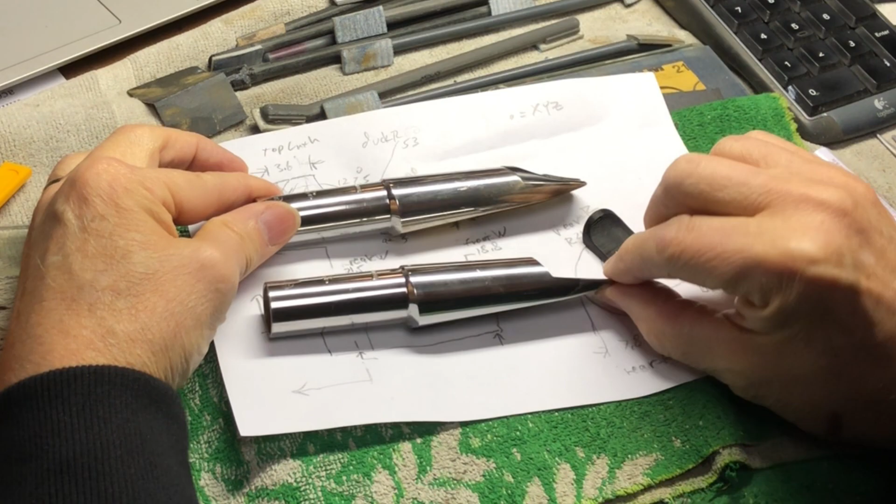Here's a video on making a tooth deck for a metal mouthpiece that's missing one. This is a Runyon Quantum. They're no longer made, but these were sold both with and without tooth decks. My client sent me one without one.

I own one myself with a tooth deck, so I have a good reference to go by. I've also made a tooth deck previously for a Brilhart Level Air, using a 3D printer. I have made them out of acrylic before, casting and shaping them, but this is just a new way of doing it. It probably takes more time this way, but once you figure it out, you have an object you can use for others.

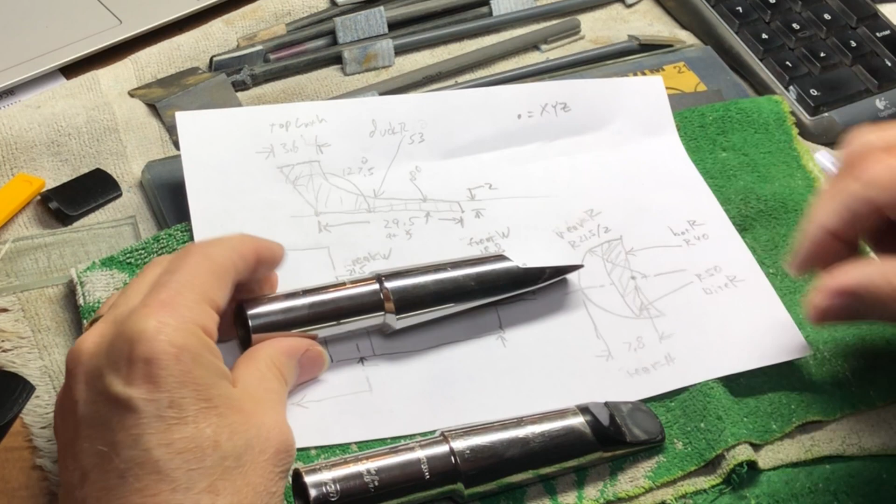We first start out by taking a lot of measurements, and I made a sketch here, taking a bunch of key measurements off of this mouthpiece. I'm going to be working in metric.

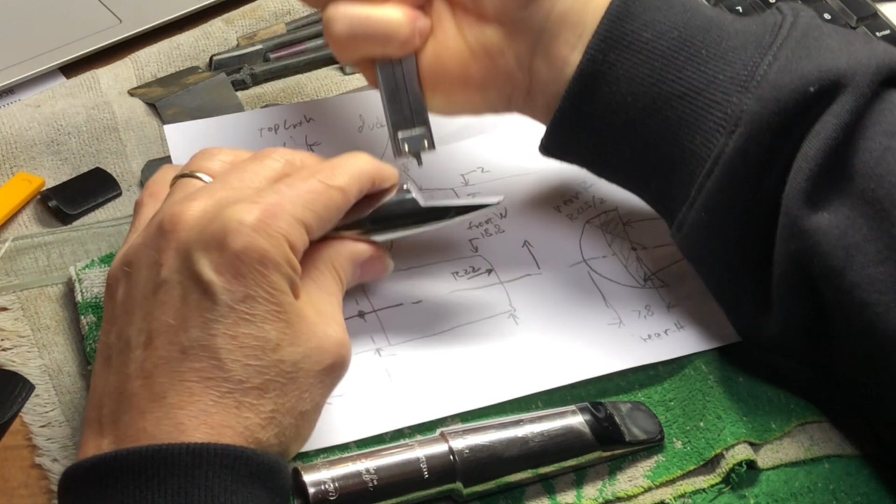So I get the width of the mouthpiece here, which gives me the diameter. Then this drop here, you have to decide whether to measure diagonally or straight across. You do have to do some trigonometry to get all this to work in the CAD system, but there's a drop here that's shorter than the radius, so this point is above the center line.

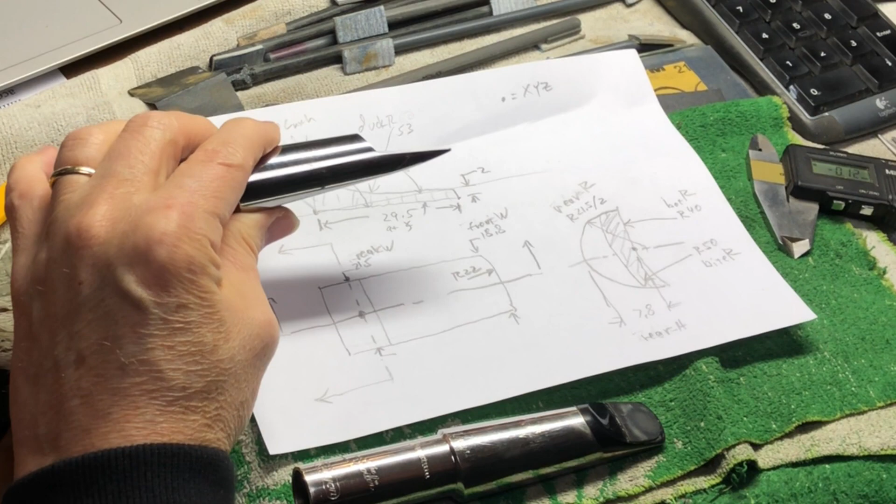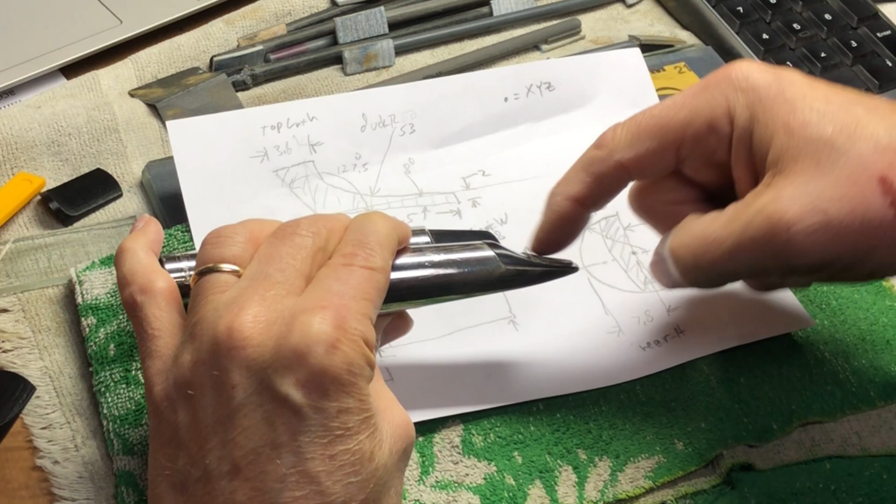Things I've observed on here: you've got a flat angled back piece. This bottom part is curved, and then you also have to model the top round and the duckbill part. The duckbill is curved in this direction and this direction.

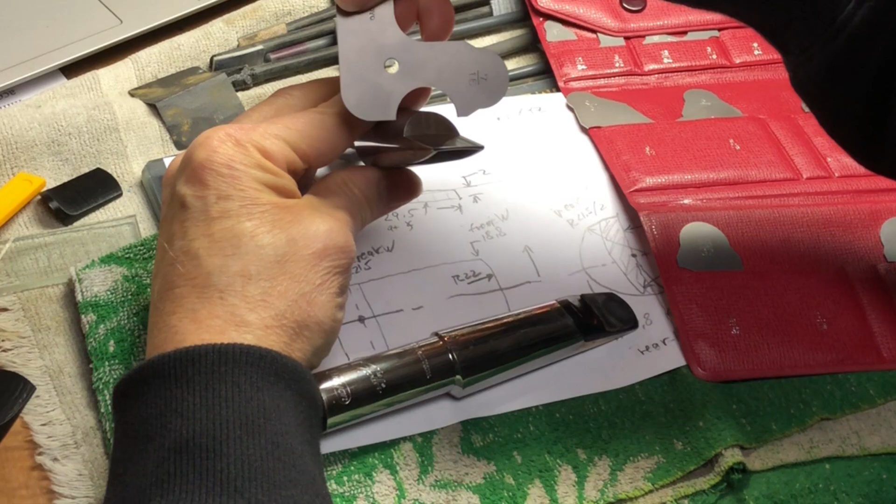So for some of the measurements, it's handy to have a set of radius gauges. On this one it was easy to measure the diameter, but you can use these to verify things. The 7/16, which isn't metric, is too large, and the next size down, a 32nd smaller, is a little too small, so it's in between those two. This is handy, but it has a limited range, mostly smaller sizes.

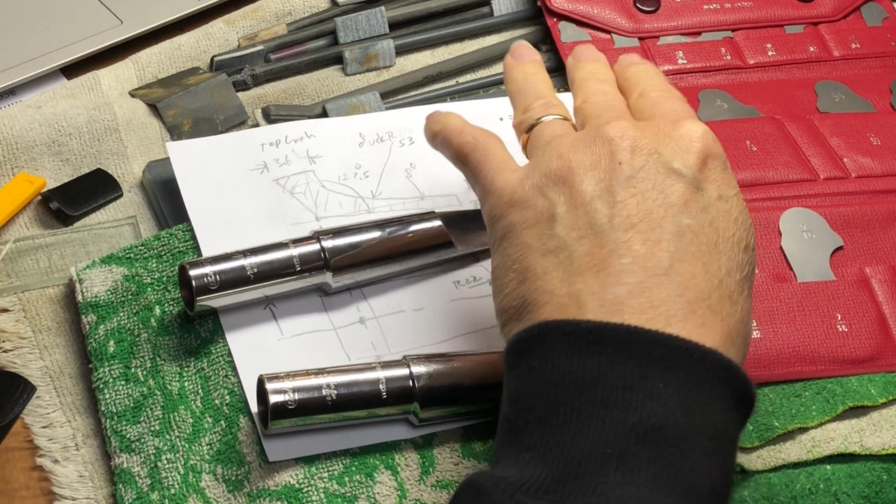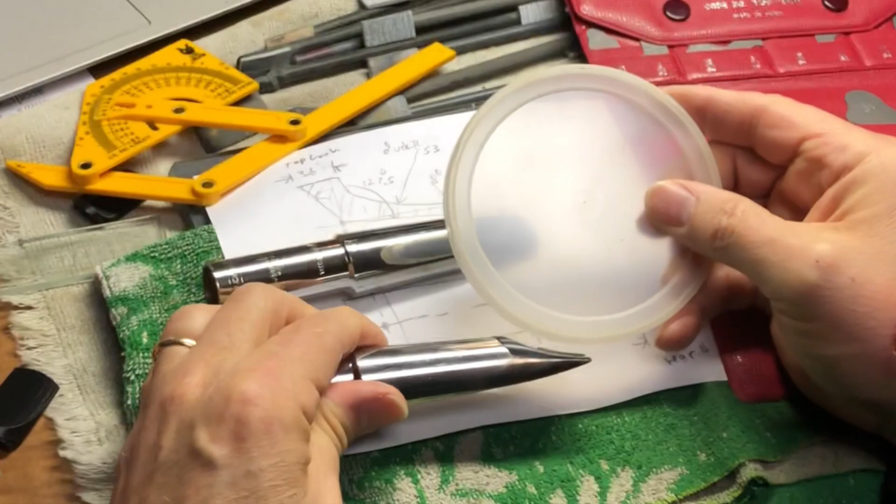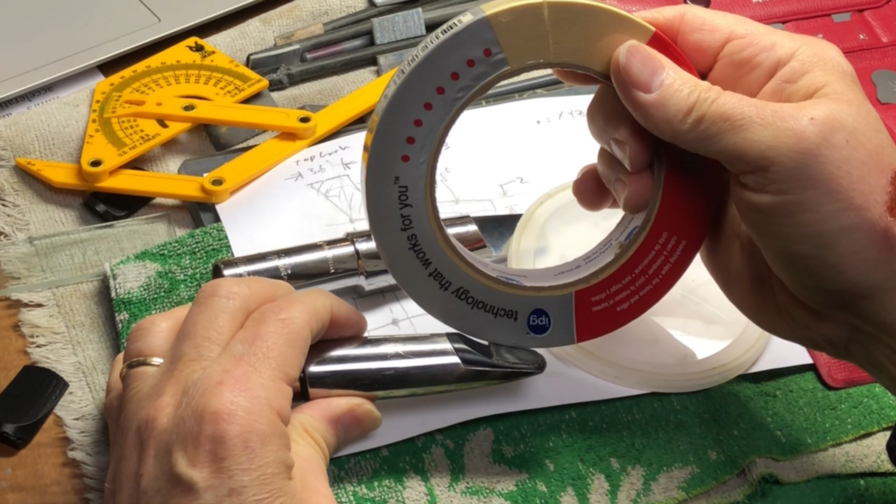When you get up to a larger radius, you have to look around for objects you may have around the house. In this case, like a coffee can lid - I held that up there and it was real close - or a roll of tape. You can measure these diameters and get a starting point at least for those.

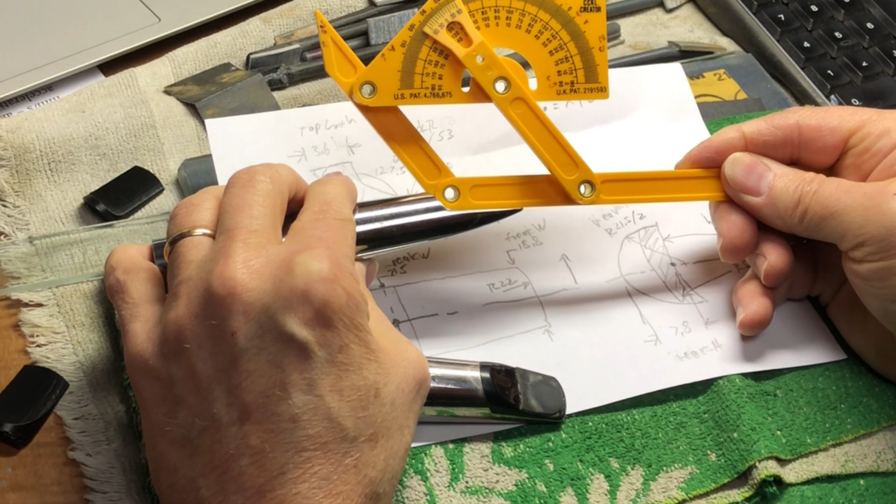What else? The angle. You can just guesstimate, or use one of these gizmos, but they're hard to use on tiny objects to get an accurate angle. It's better than nothing though, and you have to figure out which scale you're on. I thought this was around 127 degrees. Then you're just going to have to make some and adjust the dimensions at the end. So there's a starting point.

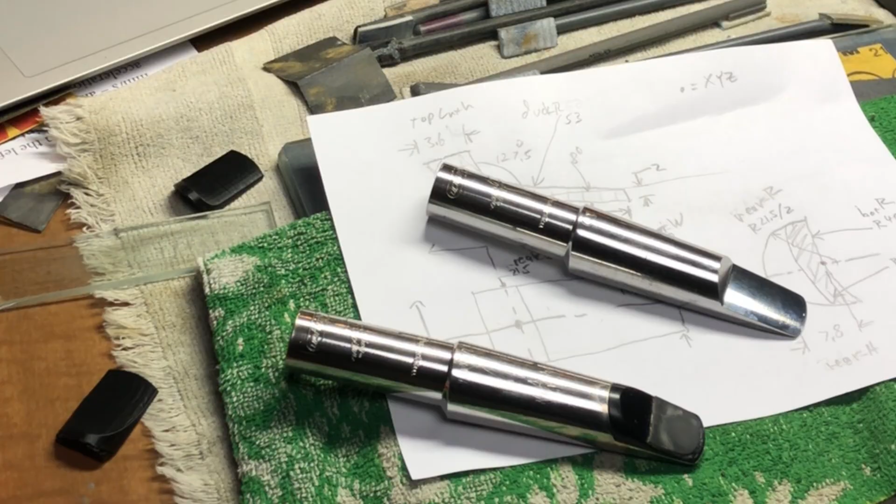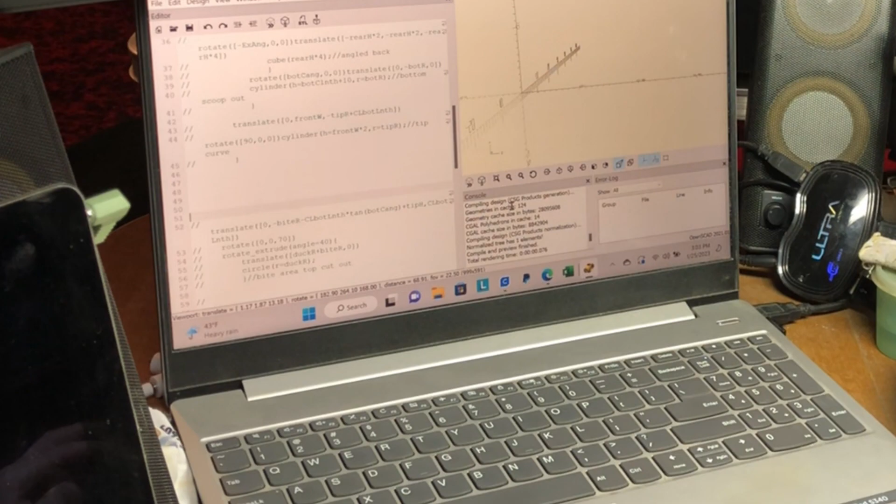Now I'll show you what I'm going to be using for modeling: a program called OpenSCAD that I like. I've tried using FreeCAD too, and I've designed mouthpieces in both systems. I prefer this one - there's pros and cons of both.

So this is more of a programming language. It gives me what I want, but it isn't mouse driven - it's code driven, as I'll kind of demonstrate. Now what I've done is I've created a bunch of variables in here.

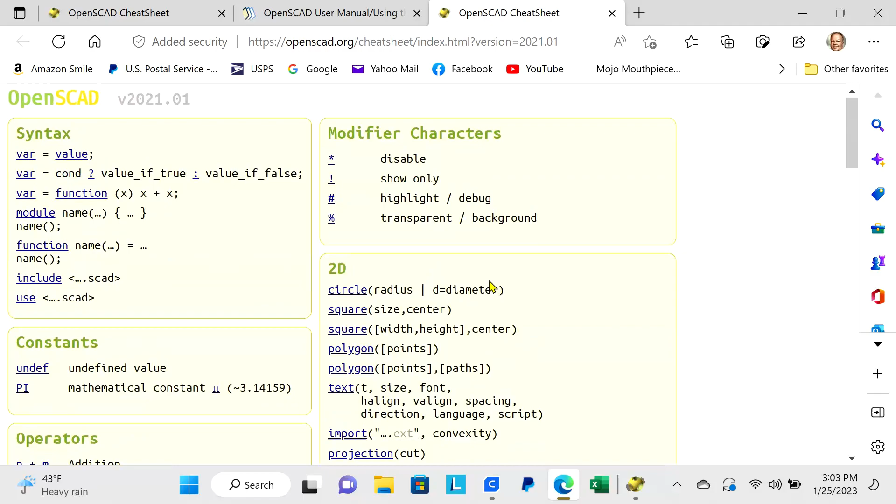There's a lot of tutorials on YouTube for getting started in this, and there's also a cheat sheet online that has all the commands. You can click on these commands and bring up individual detail about them, and learn a little at a time. A few basic commands take you a long way.

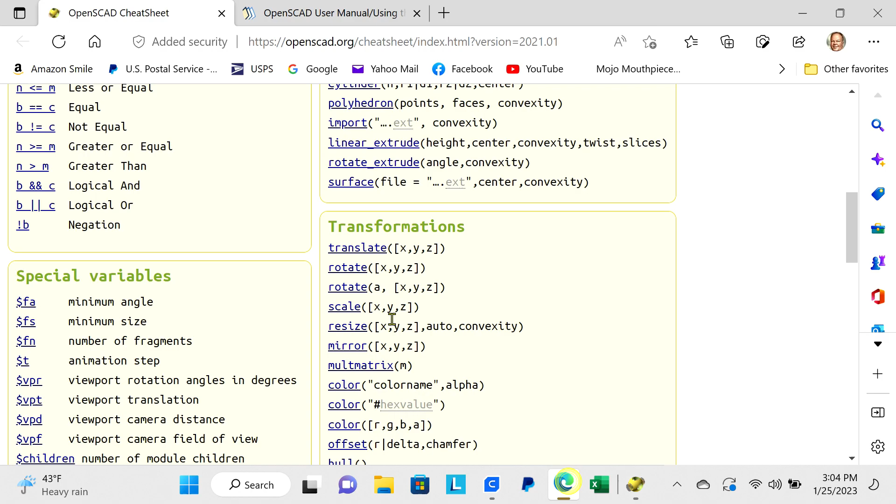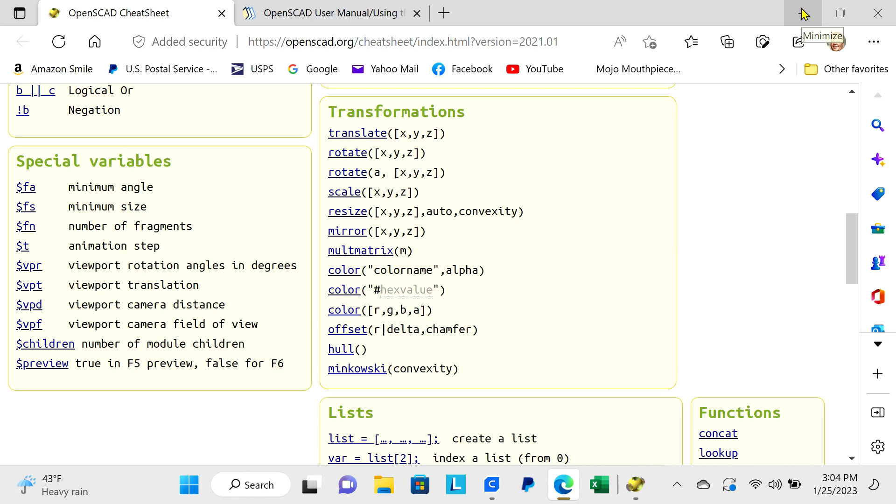So I start out with a $fn on almost everything. According to the cheat sheet, that defines the number of fragments in a circle. Their default is a little lower than I like, so you got to pick something closer to 100 to get some nice looking surfaces.

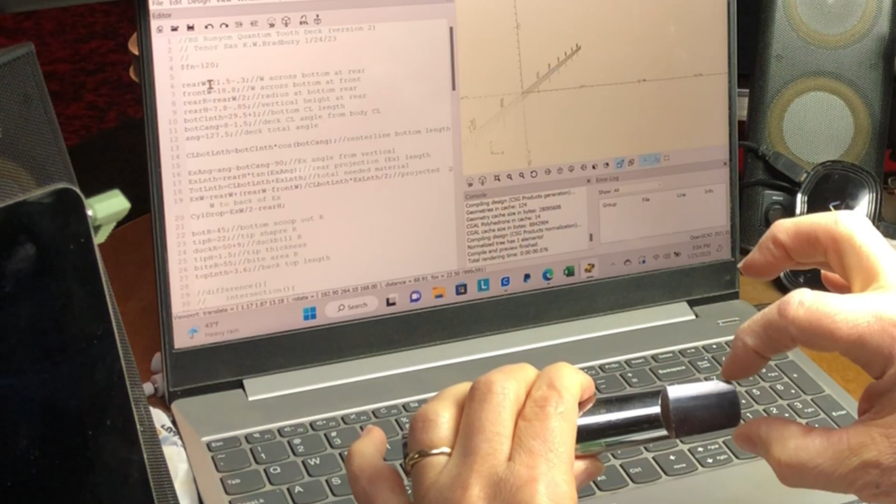Anything with a double slash is a comment. So here I define the rear width across the mouthpiece, then the front width, then I calculate the rear radius - they're all documented on here. Angle 127.5 is my starting deck angle there.

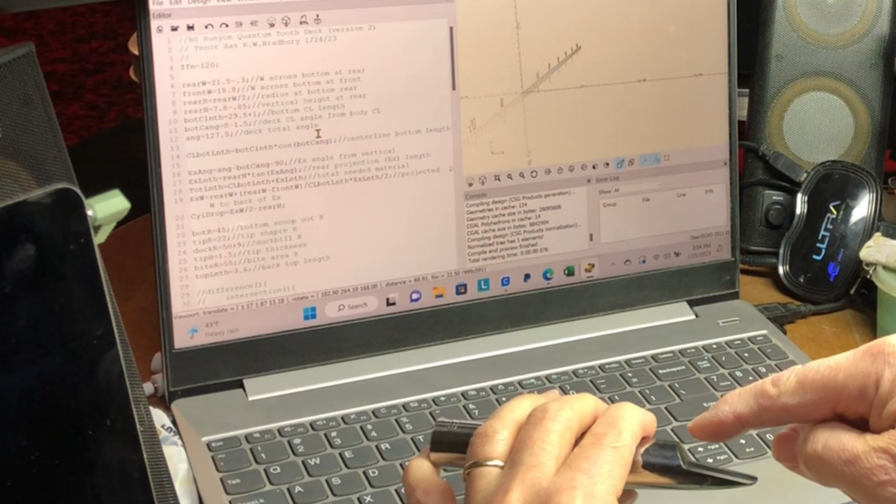It ignores everything after the double slash, so they just comment on what your variables are to try to help you remember it, because there's no graphical way of showing it in here.

Now the code, you don't have to indent it, but it makes it easier to see a lot of commands that may be multi-line long. So I do that. I also try not to put too many commands on one line. It's easier to read, and as I build the code, you'll see how I do it.

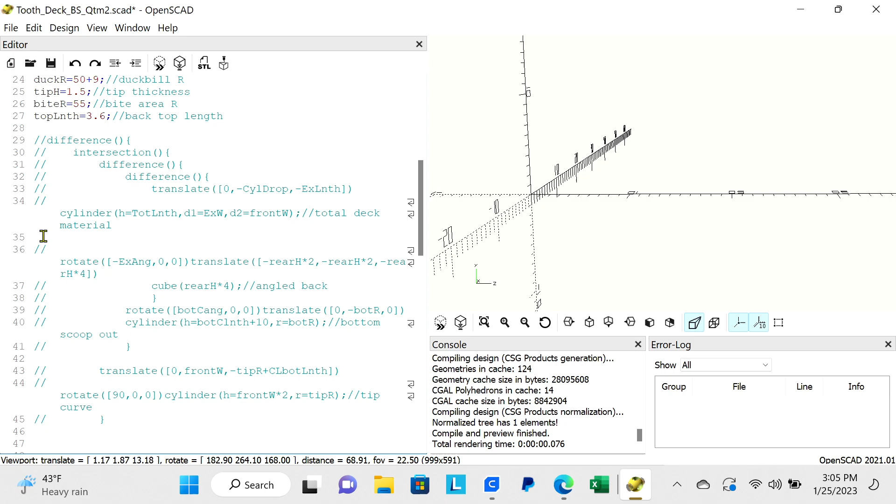So we start out with what I call the total deck material, which is going to be made out of a cylinder. I have the code set in my preferences so that I have to hit preview for it to generate. So there's my starting cylindrical material.

In OpenSCAD, it puts everything near the origin. Hit the Shift key, and you can use your mouse to rotate it around. In my case, I decided to choose the center of the top of the mouthpiece at this V as the origin. So this cylinder needs to be repositioned back a little bit.

And that's what the next command does. Okay, cylinder in black - that's all we have done now is this cylinder. Now above it is where I move it. The translate is a command that moves things in the X, Y, and Z direction.

You can see your axis is always showing here. So we don't want to do anything in the X, but we do want to move it both in the Y and Z direction. So there it is - you have to drop it down a little, and then we had to move it back some. Then we start chopping away at it.

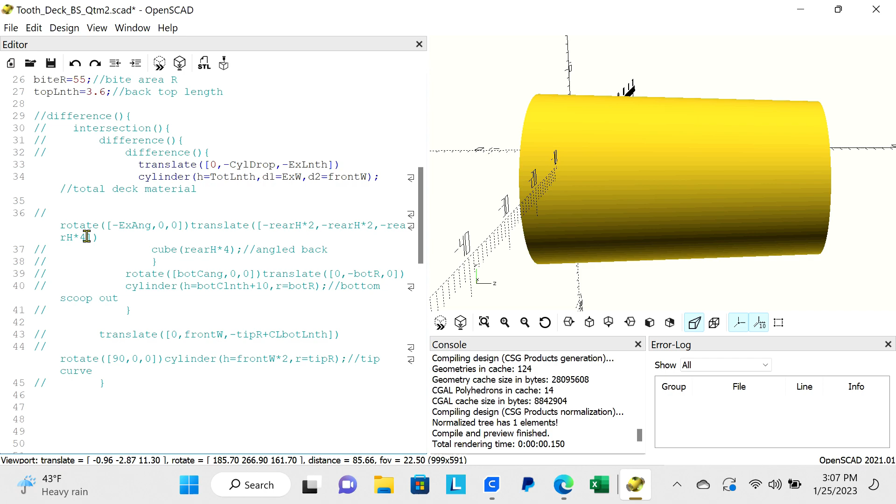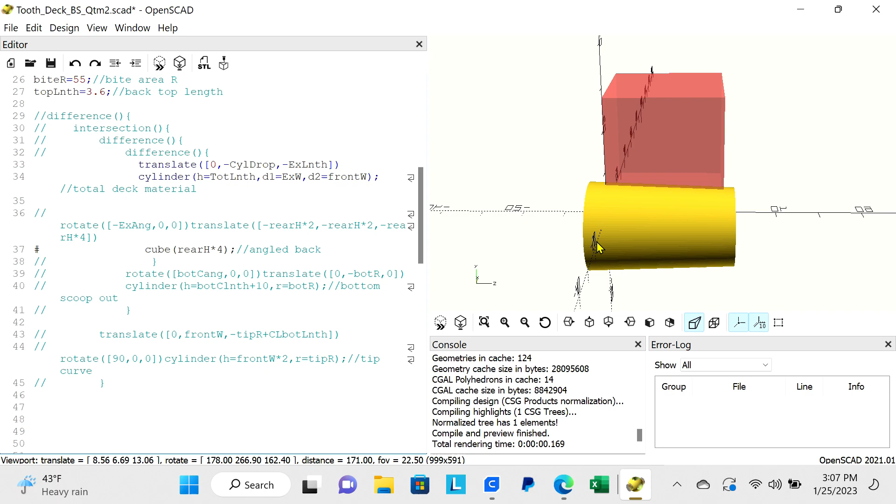The first thing I do is position a cube-shaped material right here, line 37. Boom, boom, I created a cube. I'm going to put a number sign - we'll make it red translucent so you can see it. And that's where it default draws it, with one corner at the XYZ origin.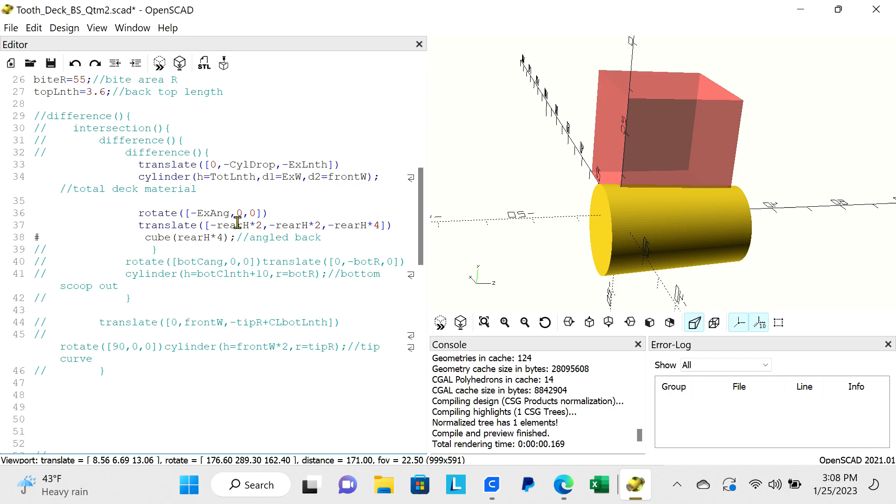What I want to do is position this near the back to cut off the angled back of the tooth deck. So above it, I have a translate command - that could be on a separate line. So here's a translate, I move the cube XYZ, and then I rotate it. So both of those will now happen.

Now, if I took away the rotate, it would be like that. So it rotates about the origin. You've got to make sure you rotate things the way you want near the origin, and then move it where you want it in some cases. So yeah, we do that.

Then to subtract it, you use something called a difference command. That's when I first started - I had the difference command right above this line, but I later added stuff. Actually, it is right above everything. Here we have the total, the cylinder and the cube, and you want to subtract one from the other.

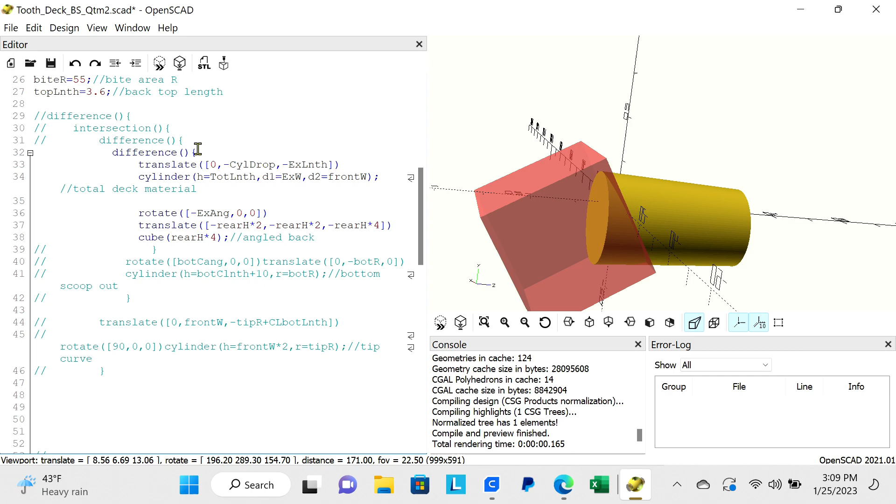So let me take this difference out. That open bracket starts the command, and down here is a closed bracket that ends the command. You see everything is indented - this is a wraparound, but everything is indented all the way up to this point, and that's one kind of thought. And it slices away the cube portion behind that cylinder. So that's one.

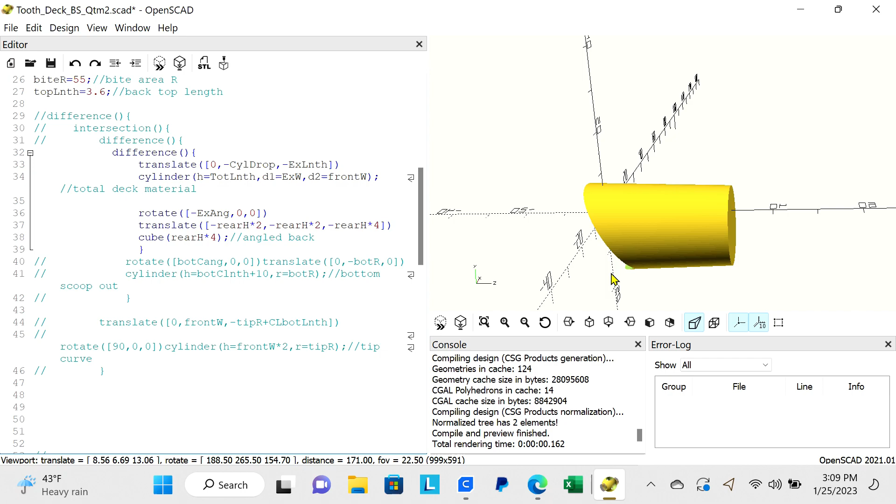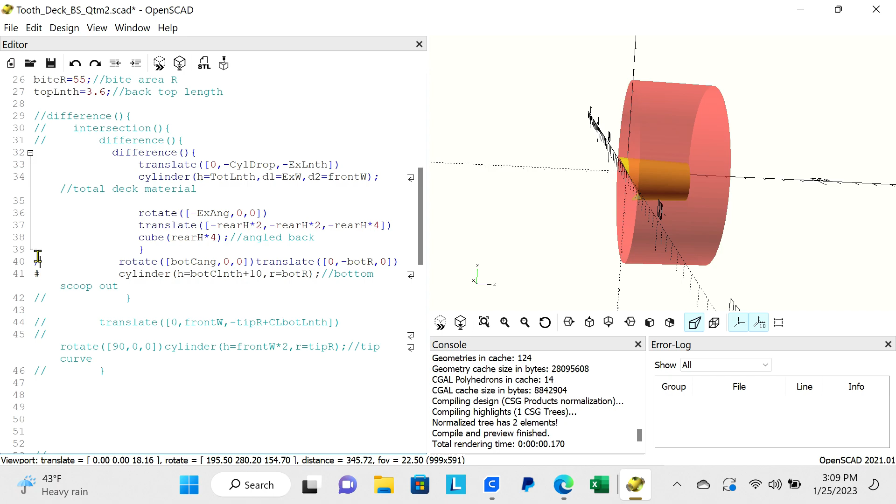Now the next thing I'm going to do is draw a cylinder to scoop out the bottom. Again, it puts it right on the origin. It's a big cylinder, but the scoop on the bottom is almost flat, so it has a very large diameter. Now I want to position that - so there it is, positioned underneath the tooth deck, and we want all that material to go away that's underneath it.

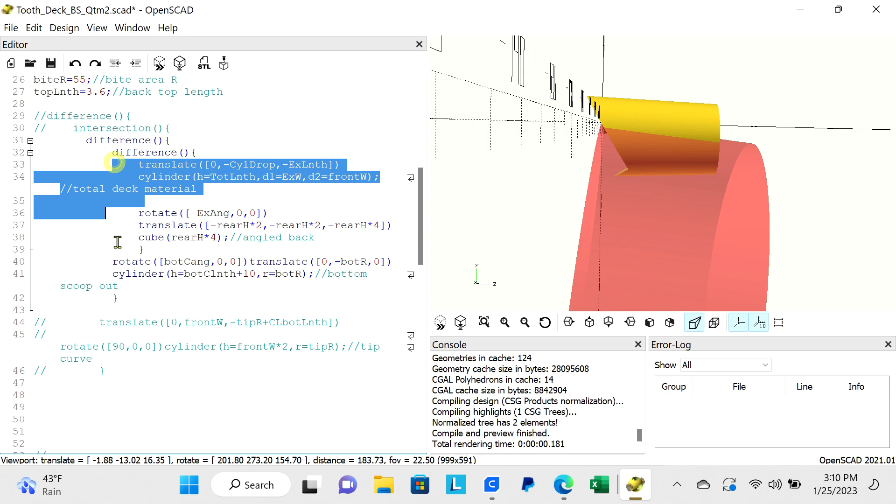So we go up, and there's another difference command up here that I've commented out. So bring that into play, beginning bracket, end bracket. And this is indented so that it's the previous difference minus the new cylinder. Okay, so that's chopped away.

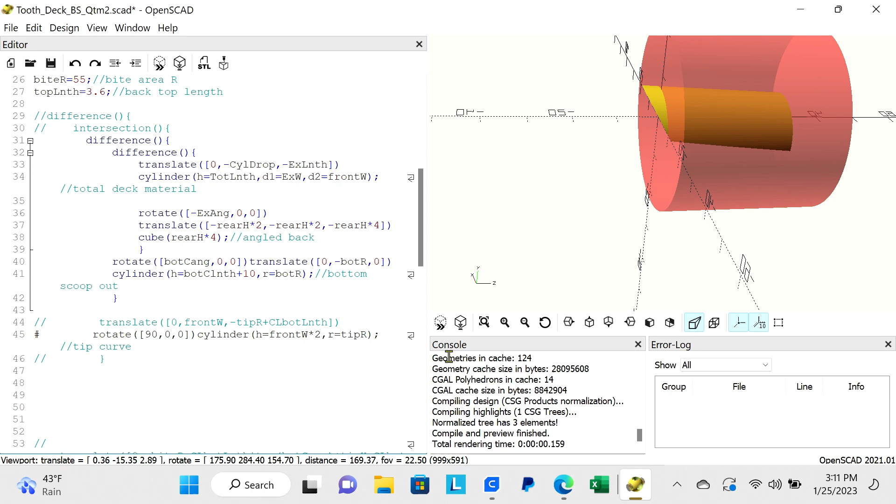One more easy one now is the tip curve. So the next thing I do is draw a cylinder for the tip curve. I'll highlight that with a number sign. Zoom out - and I have to position it where it actually, it's already been rotated 90 degrees. Normally, when you draw it, it would be like this. So I already had a rotate command of 90 degrees about the x-axis and moved it down. Now I want to translate it to the beginning.

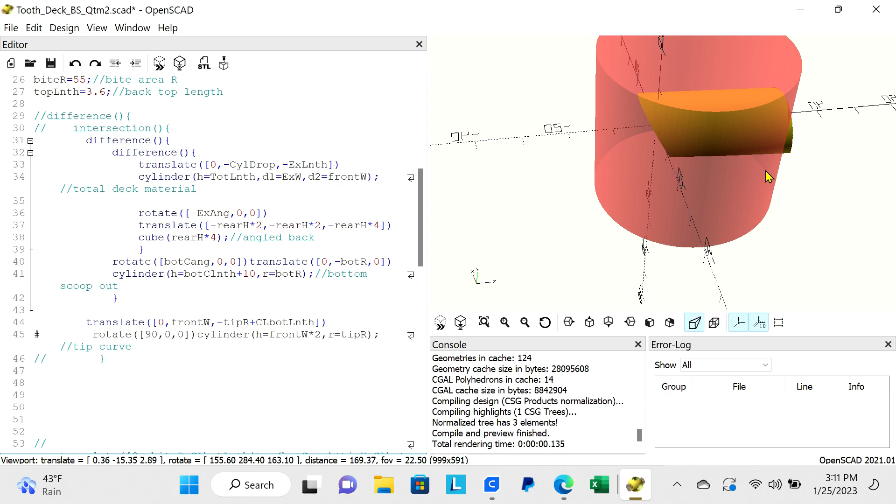Okay, that's positioned. Now, in this case, I can't use a difference. I use what's called an intersection command, and it keeps the material that's common to both objects, and it throws away this part on the outside. So up here's an intersection, boom, boom, and the end bracket for that is down here. Okay, and then let's get rid of this number sign.

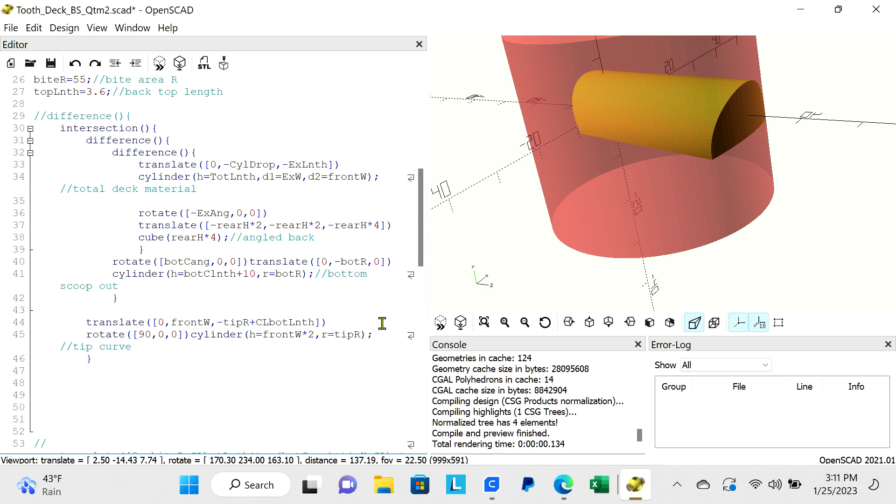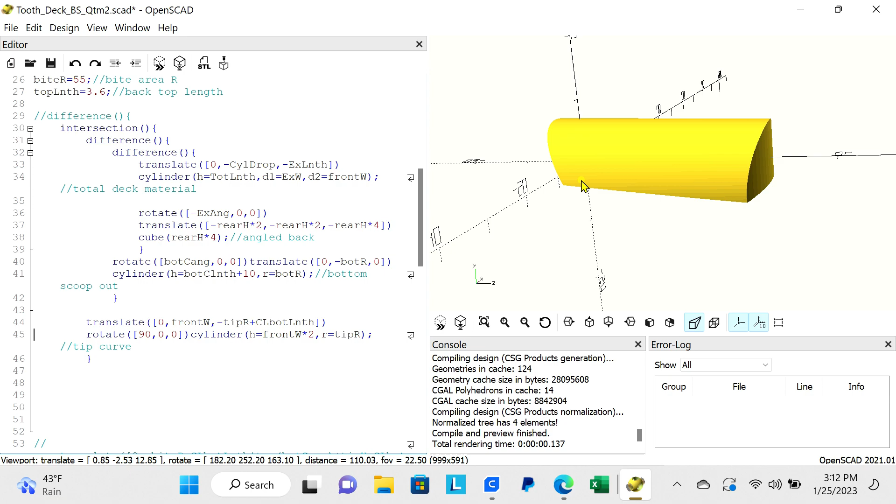Okay, now the last piece is the top, the duckbill, the beak area. And as I said before, that's complicated because it's curving in two directions, like a saddle. So, let's see what else we got going on. So the next thing, the tip curve, for some reason I had a bunch of spaces in here. I can get rid of them.

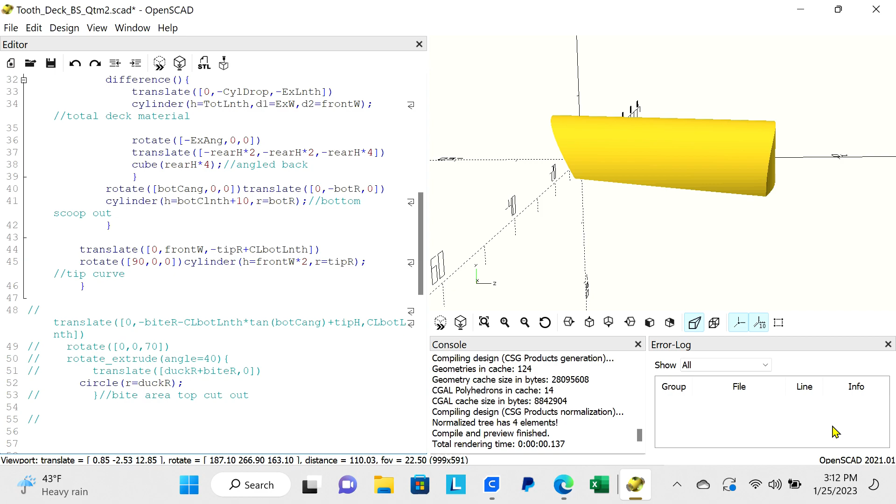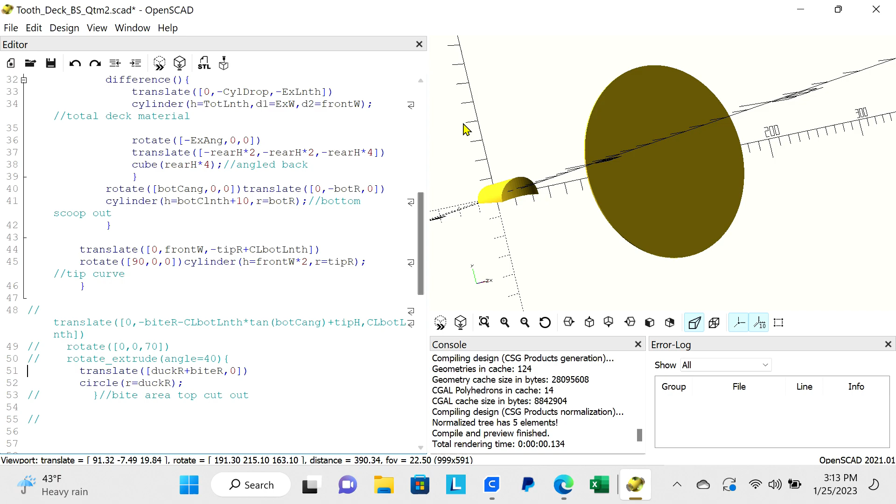We needed to draw, okay, I need what's called a rotate extrude to create kind of a donut shape. To do that, you actually have to start by drawing a two-dimensional object, in this case a circle, okay, and then position that away from this, it's in the XY plane, but you want to position it away from the axis, and then it's going to rotate about that axis.

And you'll have to get into your help area, your cheat sheet, and go down for where is it? You click on rotate extrude, and it'll show you kind of the syntax of how you have to lay it out, or the method. So here I'm creating one of these objects because the inside of that is a shape that's going to be taken away to create the bite plate.

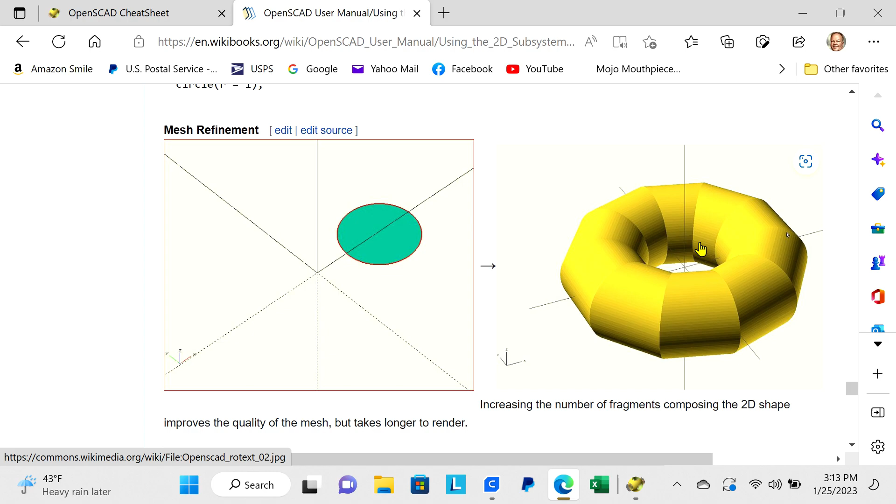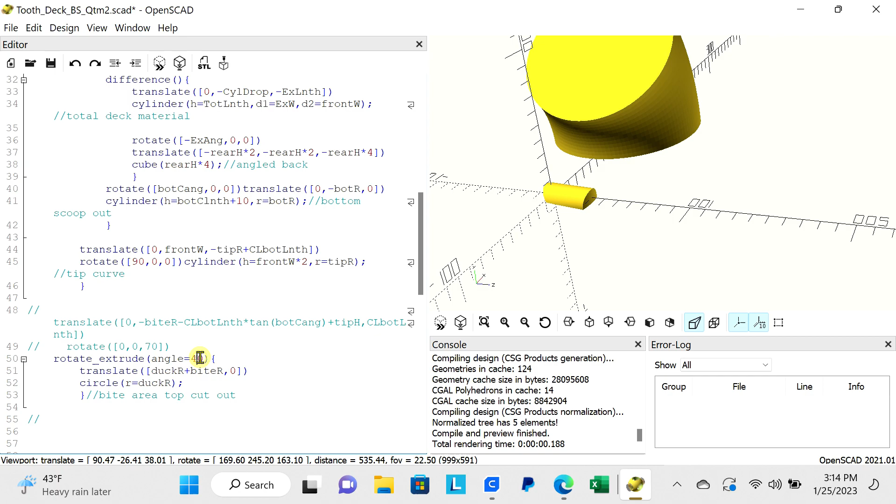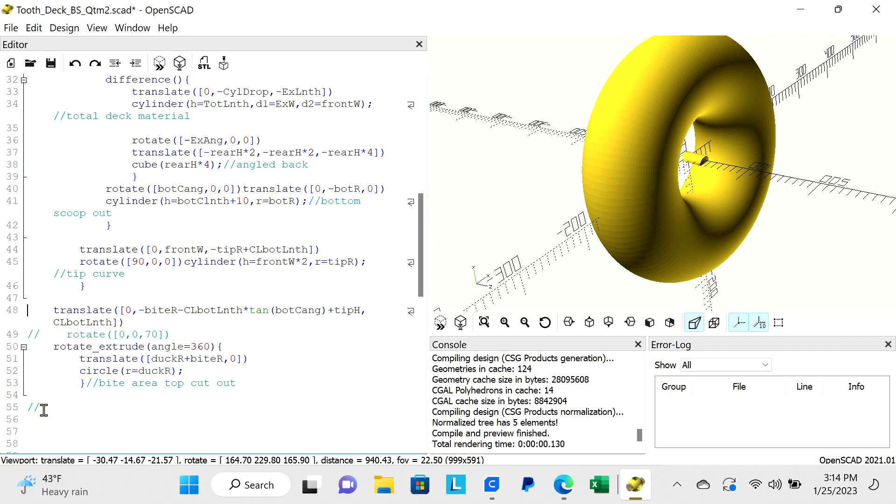So, all right, so I've drawn that, and now I have to rotate it, rotate extrude, which is start, end, and I've only taken a 40-degree angle of it. If I left it at 360, it'd be hard for you to see. The default is 360, okay, and then you can kind of see everything there, but after I reposition it, here's a translate command to reposition it, boom, boom. That'll work there. Put a number sign in front of that.

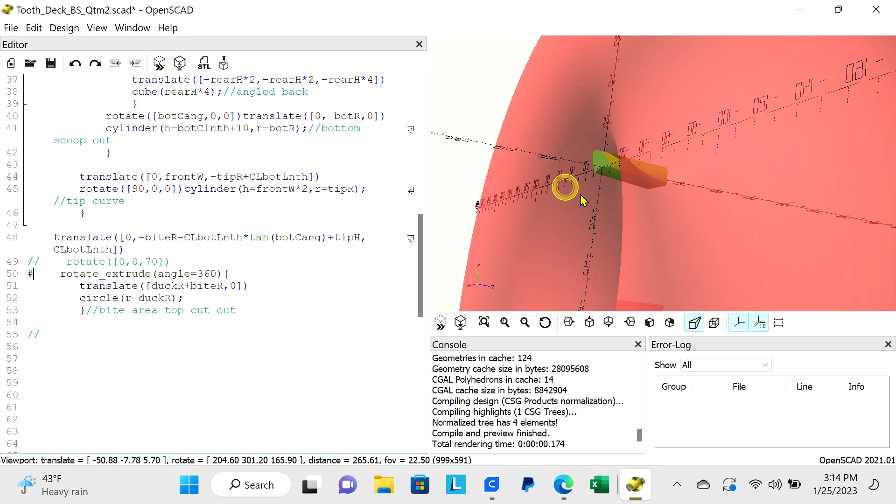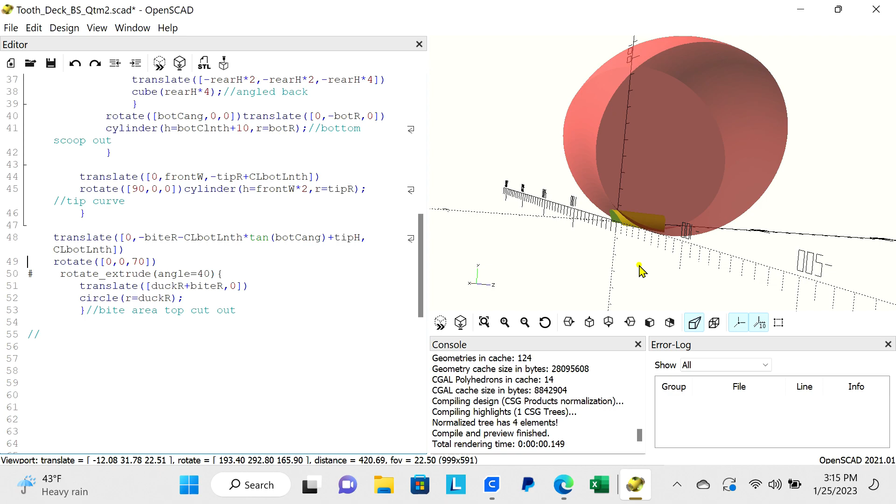Okay, so there it is, but it's really tough to kind of see what we're doing. At least it's transparent. So if I shorten that from 360 to 40 degrees and kind of rotate it a little bit, you'll see what we're actually doing here. A little easier. Okay, let's see, that's the segment that we're removing off the top, and it creates a curve in 2 directions. So, and this is just another difference command. Okay.

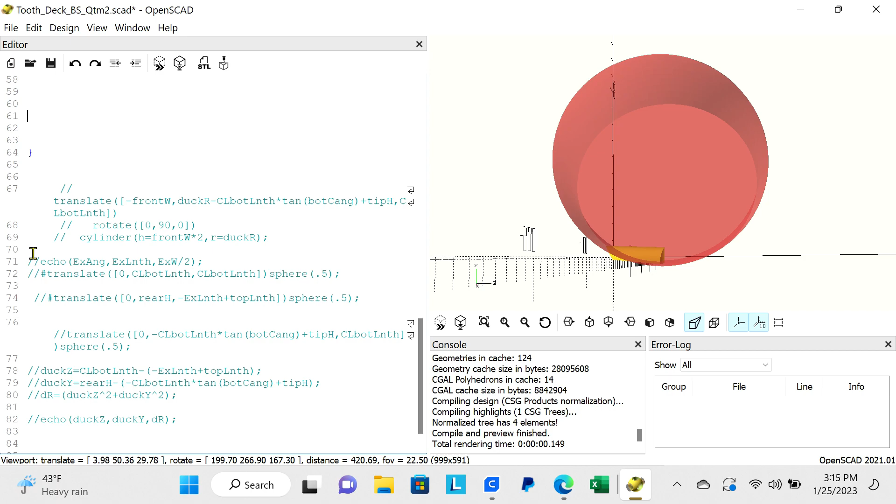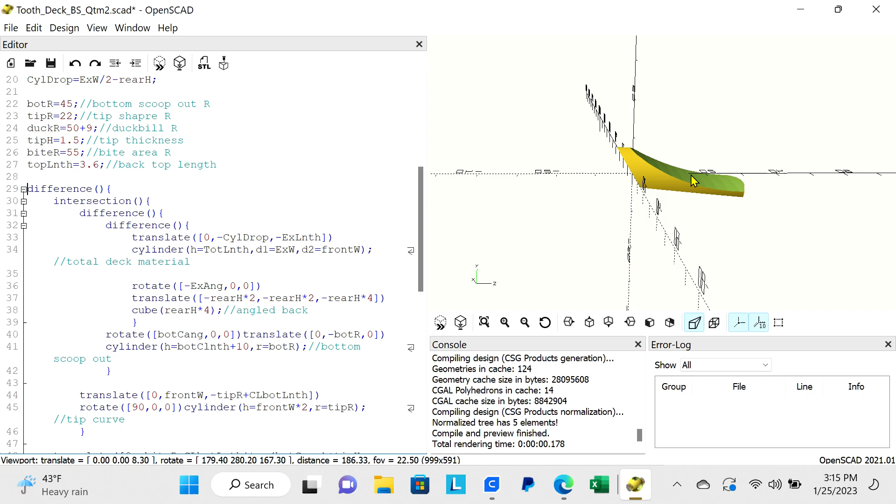Oops. Again, I don't know why I had so many, must have been leaning on the keyboard and created a bunch of spaces. Go up to the other part of the difference, and that should take it away. And that's a basic shape. And I've refined this to get all my numbers right and the way it looks.

One thing I wanted to show you, for help with troubleshooting and understanding code, sometimes it's helpful to plot a point. For instance, I had the duck bill area. I used to have it at 50 instead of 59. It was drawn way out like this, and that's not the shape I wanted. I wanted it to pass through a certain point, so I actually plotted that point.

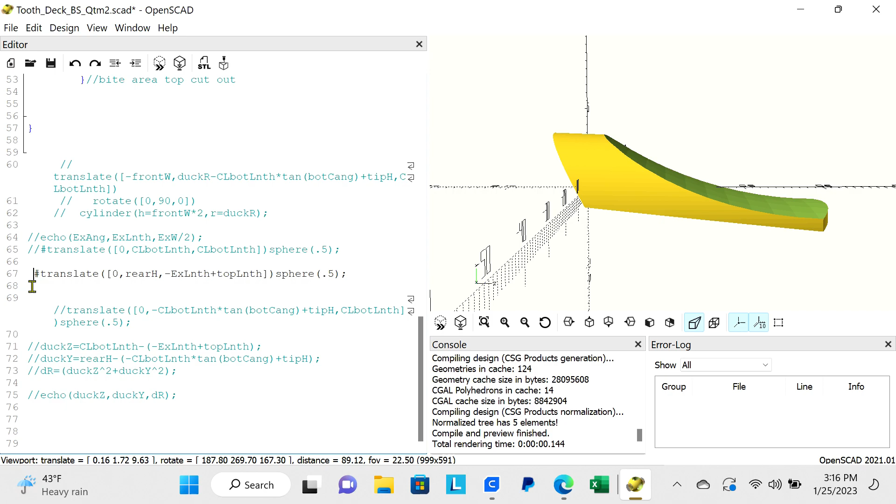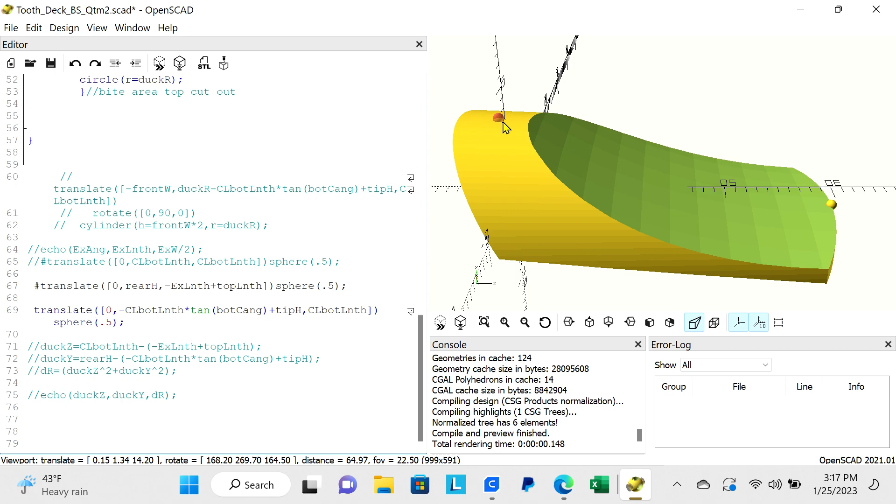You can go down, and here's a scratch area where I have a bunch of stuff I commented out, but these are a couple lines here where I actually drew a sphere and positioned it where I wanted it, positioned 2 of them. So right here, we have one positioned at the tip along the center line, and one positioned back here where I wanted the top of this to go through. And I tried to work out the geometry, the calculations to figure out a radius from these 2 points. That's why I have them here. But I couldn't get it to work.

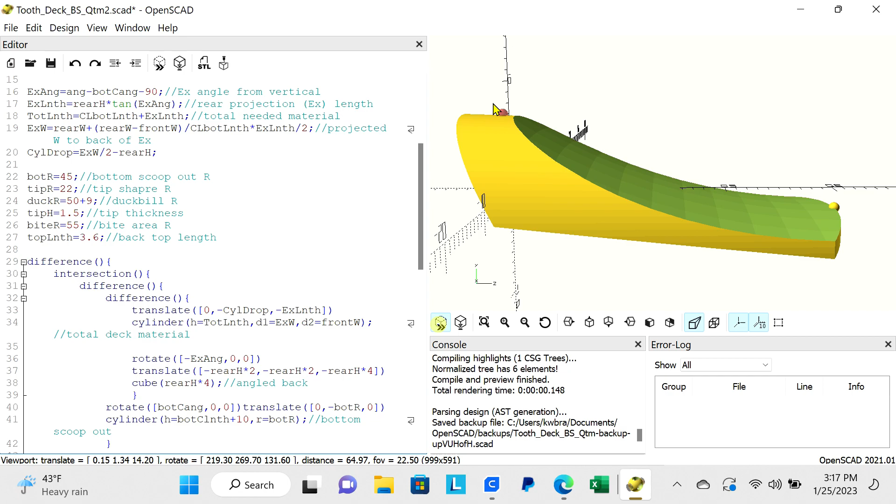So I ended up doing just trial and error after, and I may go back and visit it, but I got tired of it. So if I go back here, all I need to do is adjust my 50, keep adding numbers to it to make the radius longer, because the way I laid it out, it's going to pass through this point, but it wasn't passing through that point. So I played with this until I got it to 59, and then it reasonably went right through the top there.

So that's helpful for working with this. The other thing that's helpful is if you're trying to figure out if it's calculating numbers correctly, you can use an echo command. Let's say this echo will display these 3 calculations here, duck Z, duck Y, and DR, and it'll put it in this console area. So when you hit print, you got to go looking for 3 numbers. There it is, the echo. And there's ways you can label these and space above and below them and things of that sort. But I then compare these to some hand calculations, and it helps with some troubleshooting when you're trying to figure out why something's working or not working.

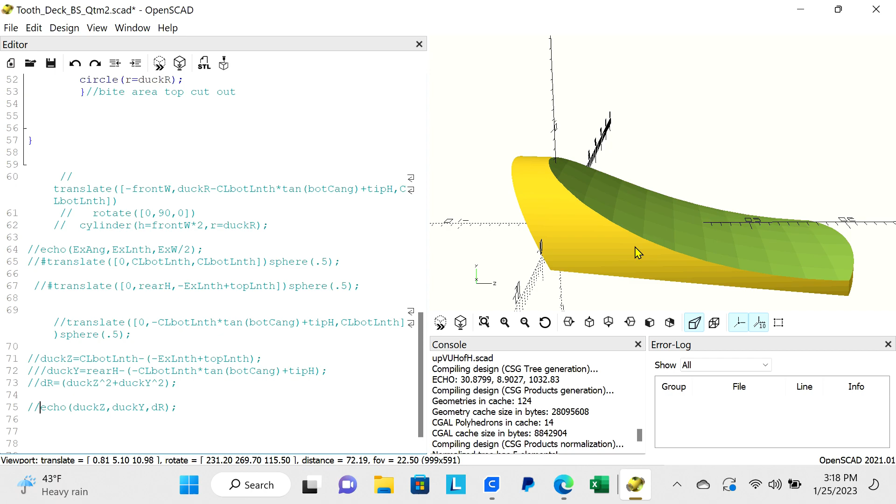Okay, there's no built-in way to do fillets and rounds. That's one thing that FreeCAD and other CAD programs do easier. It has something called a Minkowski that I've used, but it's very slow. It's not real easy to set up. It's not too difficult, but it is definitely slow. And I've used it when I've designed mouthpieces, but I'm just going to sand the edges that I want sanded. So there we have it.

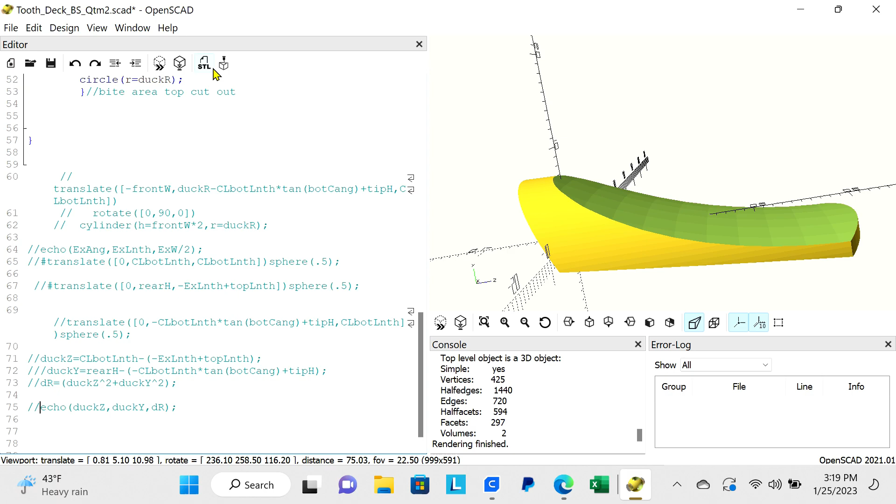So after you get something you like, you then hit the render, and basically it now creates what the geometry really is. Sometimes the preview is not as accurate as the render, but you got to create the render. Then you create an STL file, and you store that where you can find it. Okay, and then when you get ready to work with a 3D printer, you bring up a slicer. In this case, Cura is very popular. Then you bring your STL file into it, and it'll look like this when it comes in.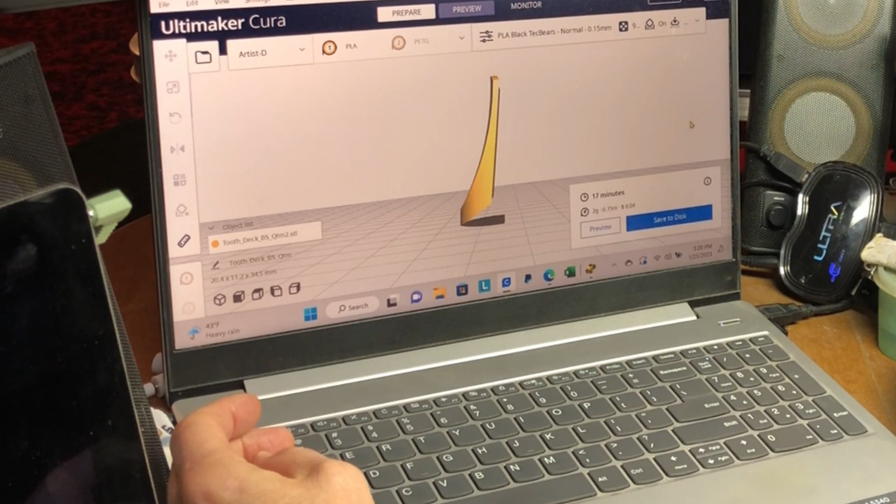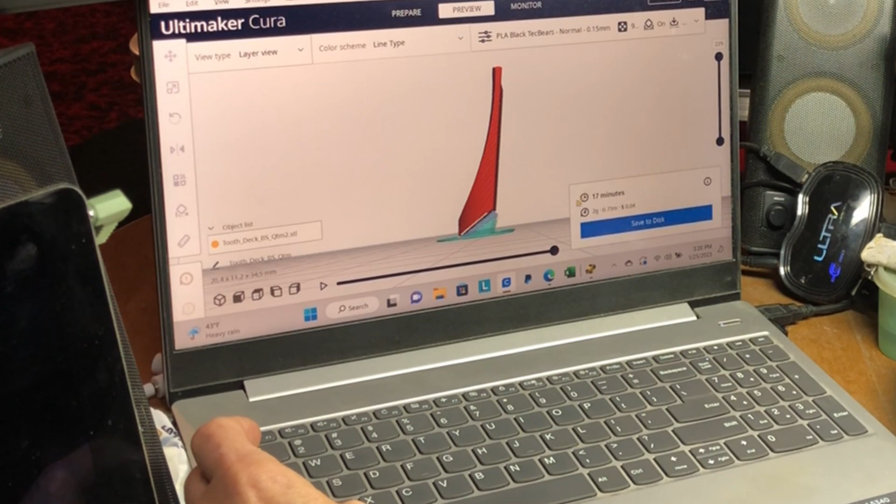I tried positioning it flat on this bottom, but this angle's pretty steep. When I did a Brilhart, I was able to print it right on the bottom. But since this is a steeper angle, I just positioned it straight up, and I'm going to fill this in with supports it can generate. So after you slice it, the slicer determines all the code that you need for the 3D printer. You can make it hollow or solid. In this case, we're making it solid. It's kind of small, thin, I mean. And then this blue down here is waste material that's only used to create the object. Okay.

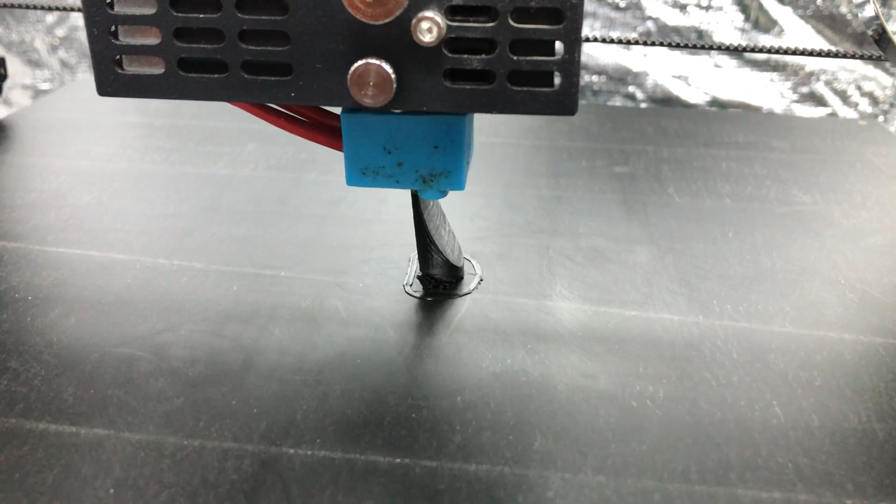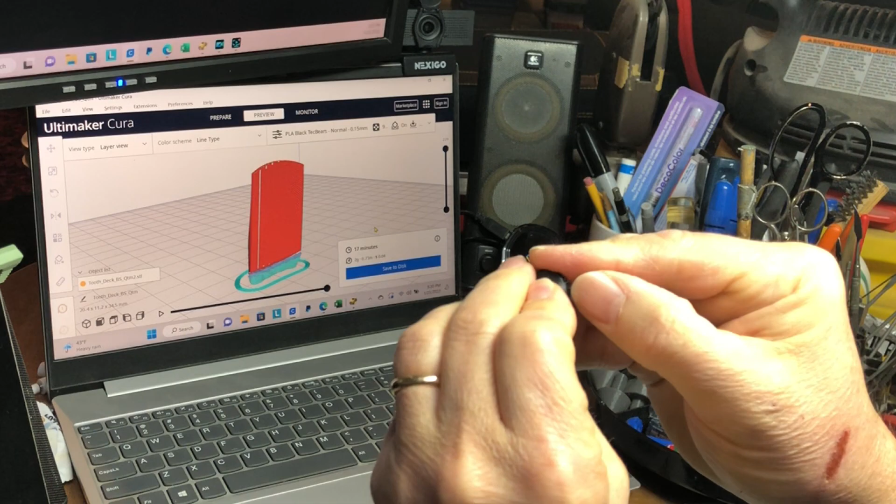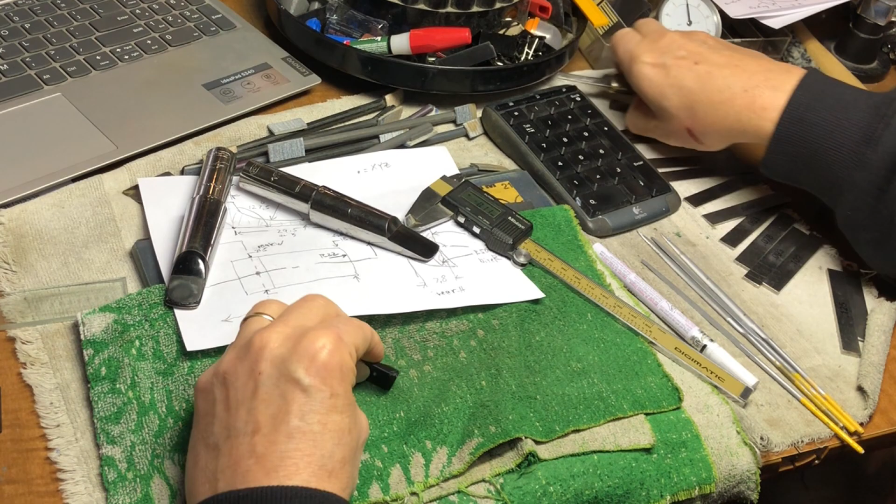Then what comes out, it looks like this. Okay, it still has a little bit of waste material on there, which sometimes is tricky to get off. Put this back down and break out some tools. There we go. So pop that off, and have to clean it up a little bit. Sometimes there's some ridges, some seams that might not lay flat. I'll do more of this after I turn the camera off. This bottom surface will need to get flattened out a little bit.

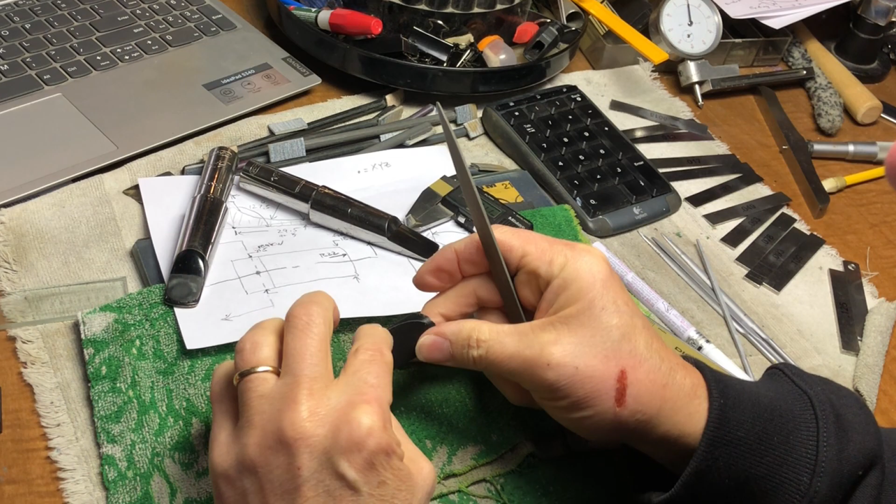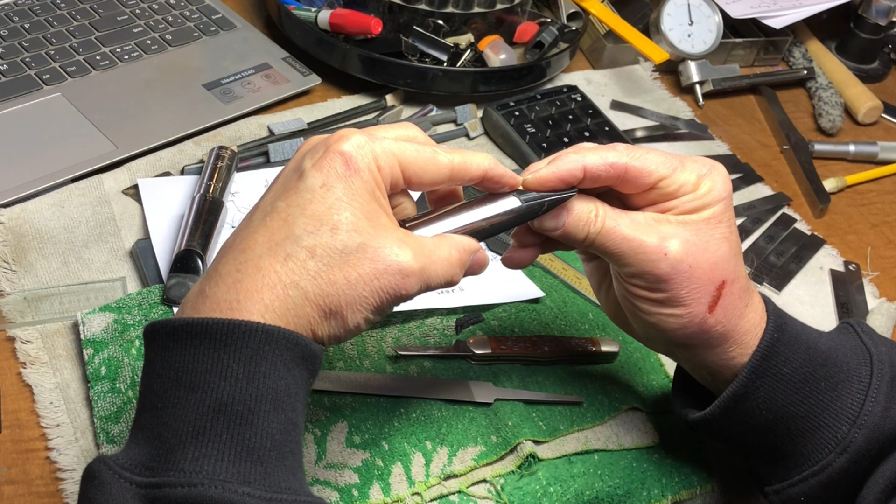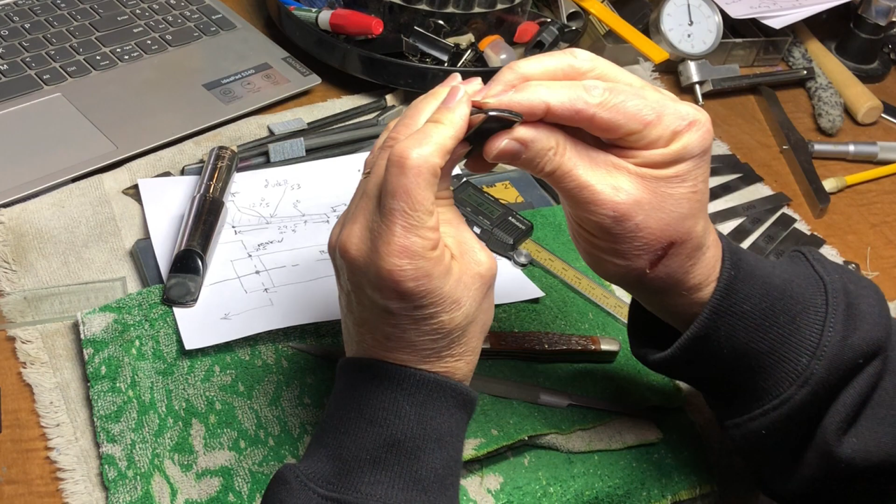Like I said, I have to sand the edges, round the corners a little, but this should work on there pretty good. It looks like that angle wants to be a little more than I have. Since I'm so close, I'll just file back this area until it fits. I think I have everything else nailed pretty good, because this is like the third, fourth one that I've done, and I'll be able to kind of shape it from here and get that all to work.

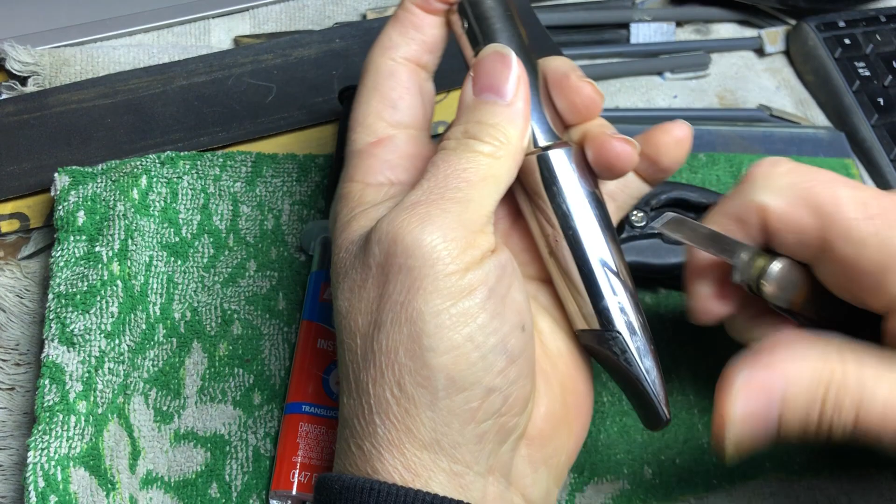Okay, this is how it was clamped up after putting some two-part epoxy on there. I used Loctite. Got to clean off some of the glue residue. I used some rough sandpaper on the plating underneath there, scuff it up a little bit to get a good grip. So that looks good to go.